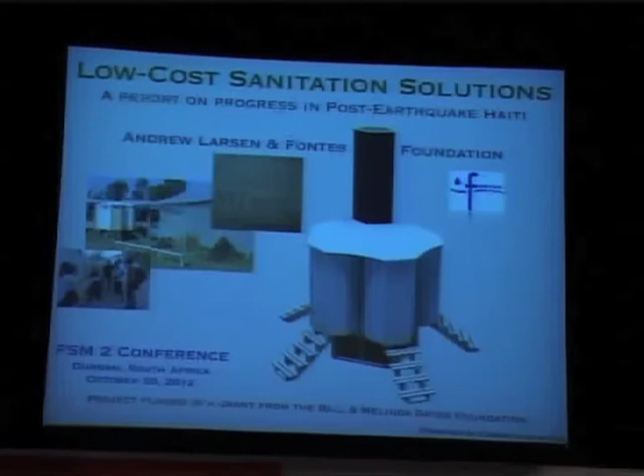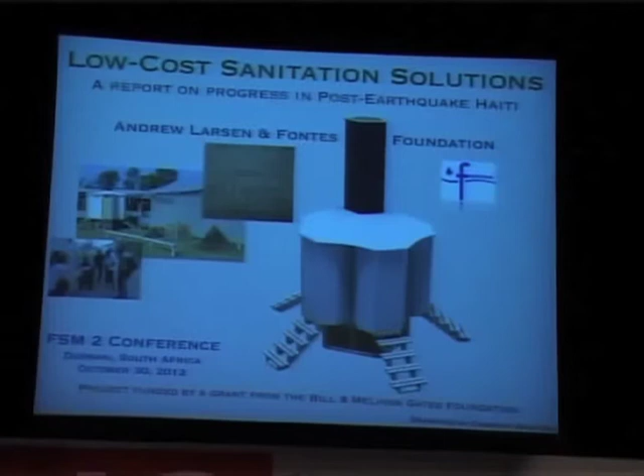...possible for me to be here at this conference and also to be able to work on this idea that I had a long time ago for toilets, and we're working on it in Haiti, but the idea is to have it be able to work in a lot of different places, including emergencies, which is one of the aspects that we want to look at.

We started in Haiti because I had experience there already from the 2010 earthquake. Of course, pictures a friend of mine, Richmond Arquette, took these, and you can see these people are so resilient, and yet they live in such appalling conditions. So it's a remarkable place to work. It's a challenging place to work, but it's good. We like working there.

It's very hot. That wears on you after a while. We've been there all summer installing these toilets with the community. We basically built them with the community from the ground up, all the tools and skills necessary. And so I'm going to go through and talk about the toilets, the physical structure, and then I'm going to talk about the process. Because there's kind of two aspects to what we feel is innovative in our approach.

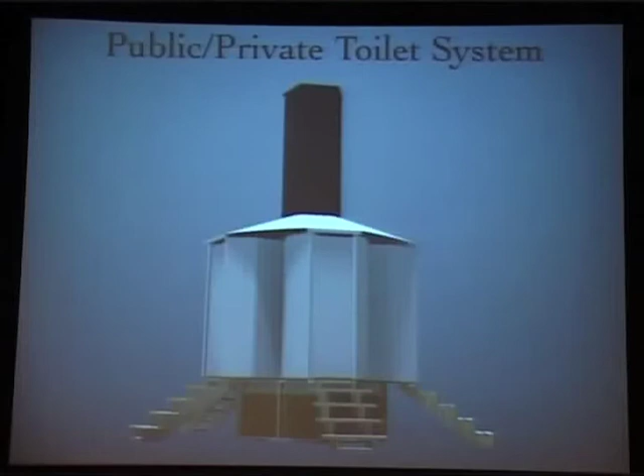Of course, we know how important it is with some of these issues here, and cholera is just one of the many. It's getting a lot of attention, but there's so many diarrheal diseases in places like this where you have high density. So here's just a picture of it. I'll come back and talk a little more about the design. And basically, we're using enhanced ventilation. So the top of this plenum is 15 feet off the ground.

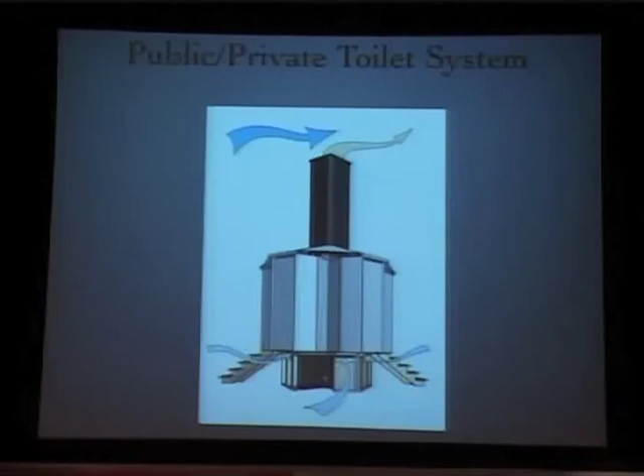So you have air moving over, and you get this draw that comes up. The air comes in the intakes, which is the support bin of the compost. That's where the composting is happening, or just feces desiccation, depending on how it's set up. It can work in both ways. And that air is drawn through, and we're just really maximizing the amount of airflow we can pull through this. And part of that is because of the way we build the toilet block, which I'll talk about in just a bit.

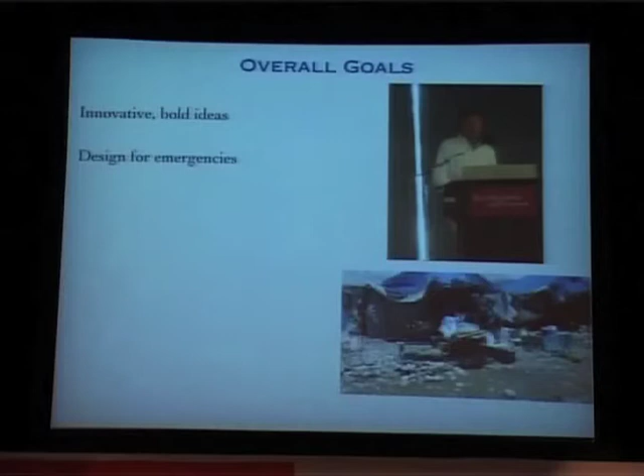But the overall goals, as we know from the Gates Challenge, have been to be really innovative and out of the box, and really try something that you only dream up at 2 o'clock in the morning, which is what I do most of the time. I wanted the structure to be low cost and robust, because a lot of the structures that we had seen, that we wanted to do our particular process in, were just too expensive and too immobile. And I wanted something that we could go into an emergency and sort of set these up out of a kit even. As it's turned out, we're working in development as well.

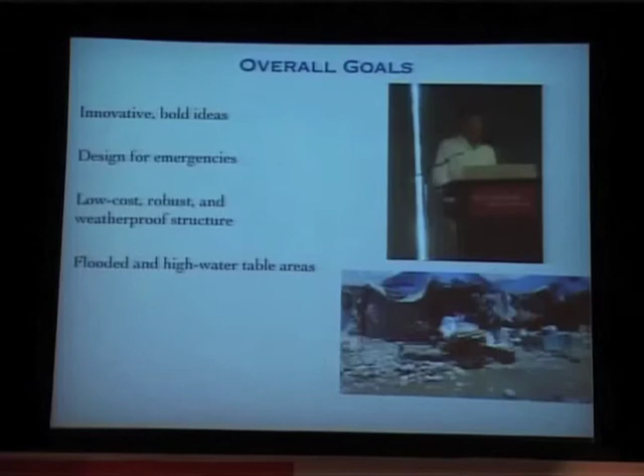There's a crossover there. So one of the areas that I chose to really focus on was flooded areas and high water table. In the community that we're working in, just since Saturday when I got on the plane, we just got word that 5 more houses got washed down the river. And this same community had to withstand Tropical Storm Isaac, which blew down most of their plantain and banana trees, which was their source of income. So there's some people living in some very precarious situations as far as natural disaster is concerned.

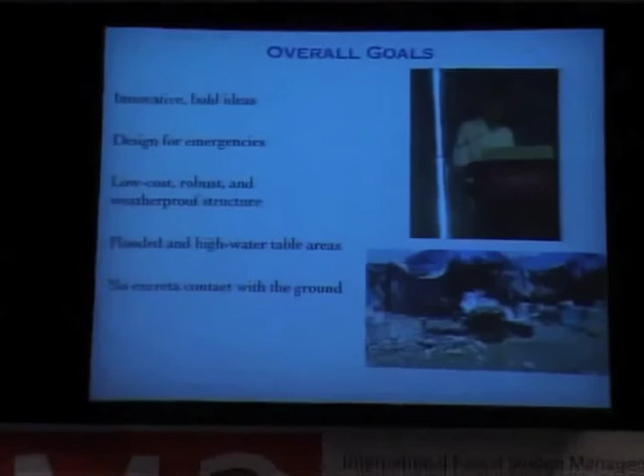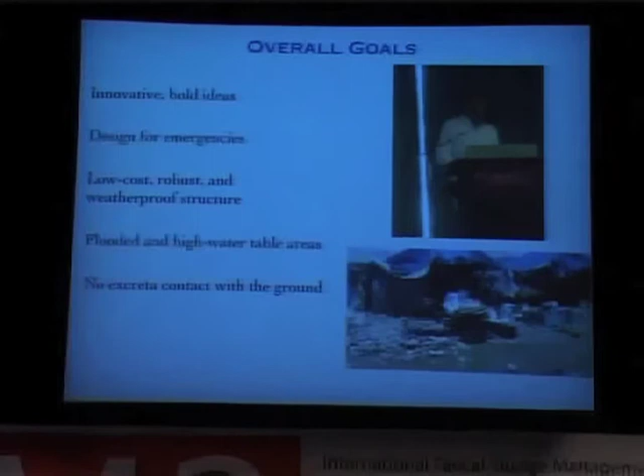Fortunately, I have to say, we're really grateful our toilets have held up through all this, and it's almost trivial to say that in light of the fact that people are losing their houses right in the same area. But we have to keep working on this. So my thing has been to make sure that no excreta is coming in contact with the ground. Urine, feces, everything is contained, it's dealt with, it does not come in contact with the ground until it's become something that's safe and usable.

As has been said by many people at this conference, this social aspect of sanitation, which is everything from awareness raising to designing and working with the communities, this is what we've done, and this is why we went and lived there. We've lived there all summer, and a lot of the conversations about shit happen, you know, on your porch late at night. It's not something you can come in your SUV and have a controlled discussion and then go back to the hotel.

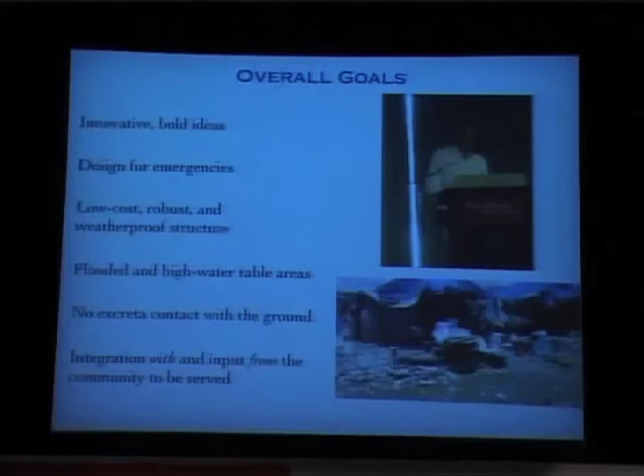We had to get to know these people and really find out why they felt the way they did about stuff. And so we were glad to be able to live in that community. Just a few things about the design now.

So the idea that I have is to take, in the US we have billboards everywhere, and they're huge. And they're made out of a really highly engineered material. It's a reinforced flex PVC. It has an advertisement on one side, and then it's either black or white on the other side. And so we don't show the advertisement. That's the only requirement when you reuse this stuff.

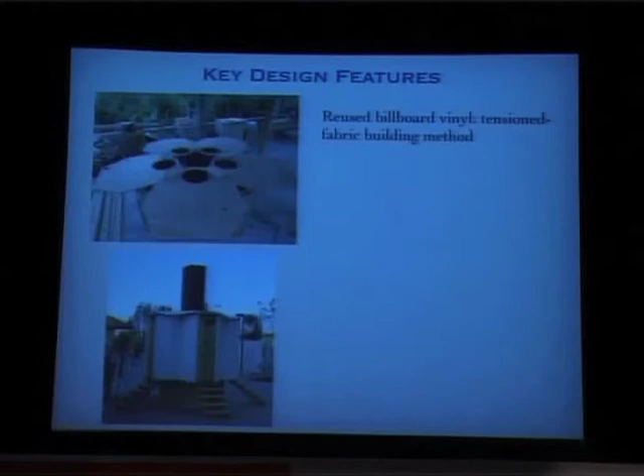And then we use either the white side or the black side, depending on what we're trying to do. White to try to keep the temperature down, and black on this ventilation plenum to help induce thermal flow. So you have this really inexpensive material and then basically a lumber frame, and then you do this tension fabric structure. And it's not a tent. The walls don't flap around in the wind. It behaves like a very taut structure. And we make sure that we keep them like that.

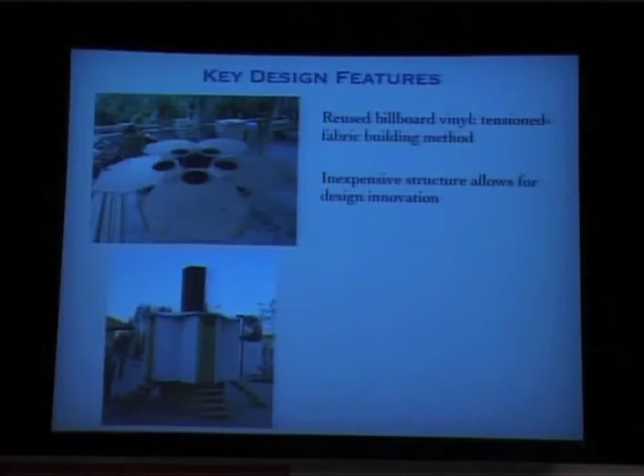The fact that it's inexpensive, the reason I was drawn to designing this is because I wanted to be able to play around with things like a lot of airflow for feces desiccation, or really being able to make sure there's no odors, because the odors are going out at 15 feet above the ground. So this is what drew me back into my construction days. I need a really inexpensive structure that I can change the design if I need to, and the existing things that I saw were not doing that.

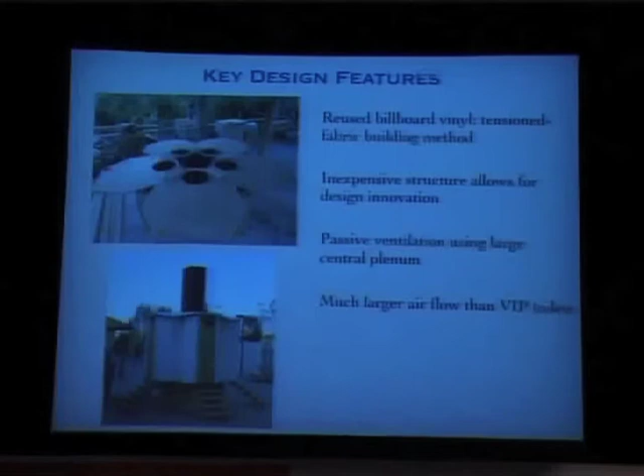So, for instance, the ventilation using this large central plenum, we get huge airflow. I've been testing it with my handheld anemometer, and the aperture is this big around, it's 18 inches across, and you're getting a nice flow, roughly a couple of feet per second, and that moves a lot of air when it's that wide.

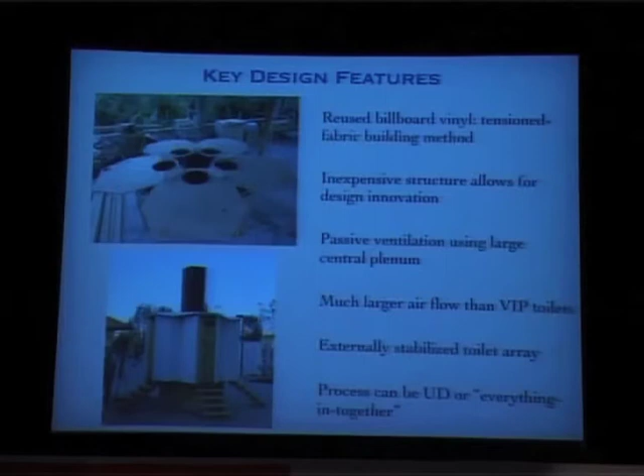The toilet array itself sort of looks like the lunar module, but the stairs come out and actually stabilize the thing physically. The process can be urine diversion or everything in together. We did everything in together in Haiti because it was just too hard to try to talk to people about urine diversion along with every other thing that we were dealing with. So we said, we're going to just keep it simple. We've already done composting there. We knew that worked. And so we kept it all in together. But the urine diversion part is something that the same structure will accommodate. We're just going to do that in a separate step.

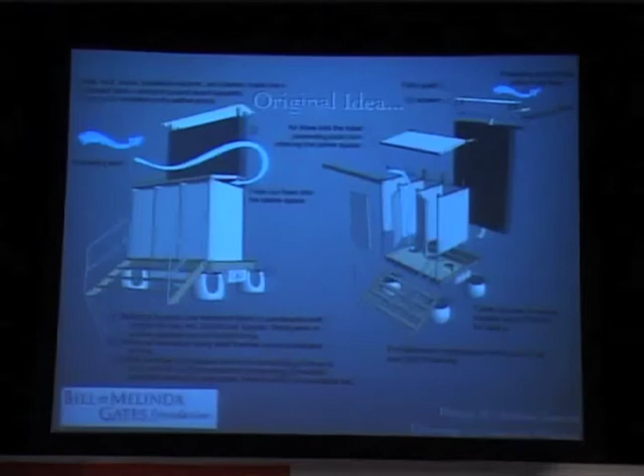And I want to point out, too, that the structure, if somebody comes to me and says, I have my own process, can you give me a toilet block? Yes, that's the other part of what we want to do. And I've had those conversations already with several people. I'll make a structure that works, with a door that works, and it doesn't fall over in the wind and so on. And you can put in there whatever process you want.

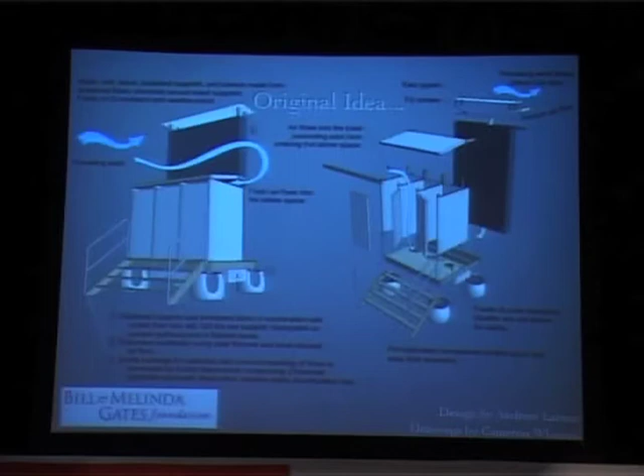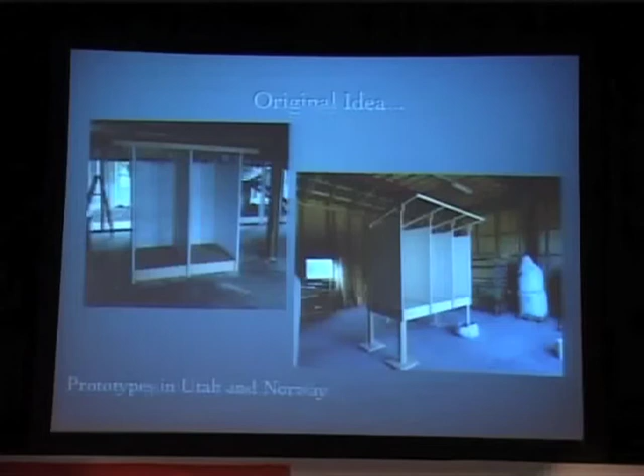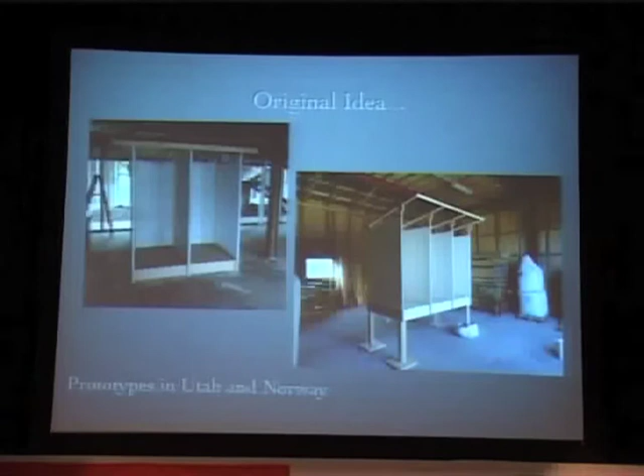This was the original idea. I'm just showing this first. This is very boxy and strange, and I thought it was a great idea at the time. We built a couple of things, and it just didn't quite suit me right. And this design iteration kept happening during the grant period, and it's been really fun to build an experiment in the shop, and then go draw, and then take the drawings and build that again, and then the two things inform each other. The design now looks like this.

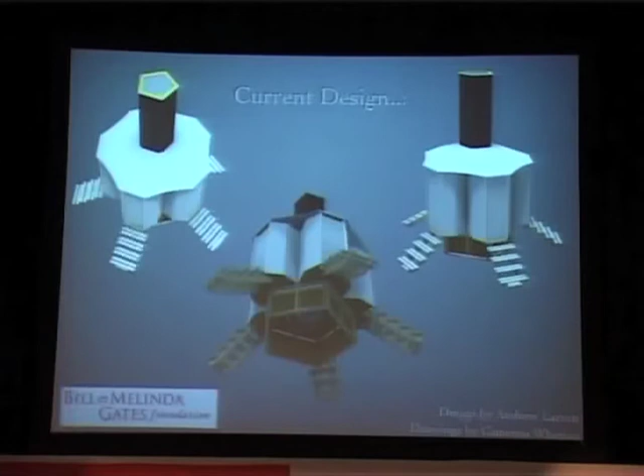The bag isn't shown here, but the same material that we're using for the structure we use for a bag underneath this that you can take out. And this stuff is ridiculously cheap, and it comes in big pieces. So I have no seams. I don't have to sew anything together. There's no vinyl welding. All I'm doing is I get scissors and we cut.

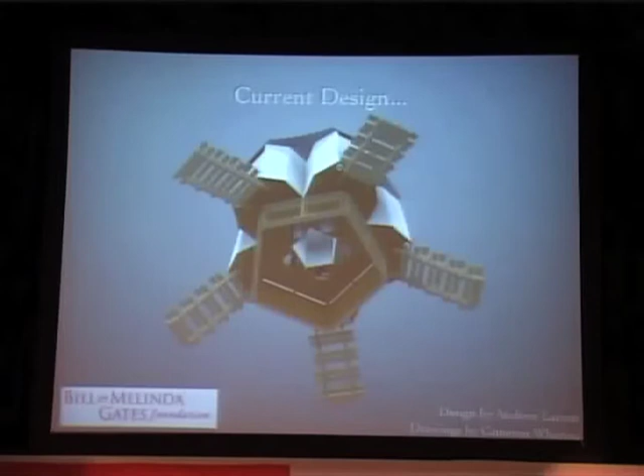And if we need a piece that's bigger, we get another one. But we work it out so that we're not wasting material. Here's what they look like. These first couple ones were not quite where I wanted them. We're getting a little better at building them.

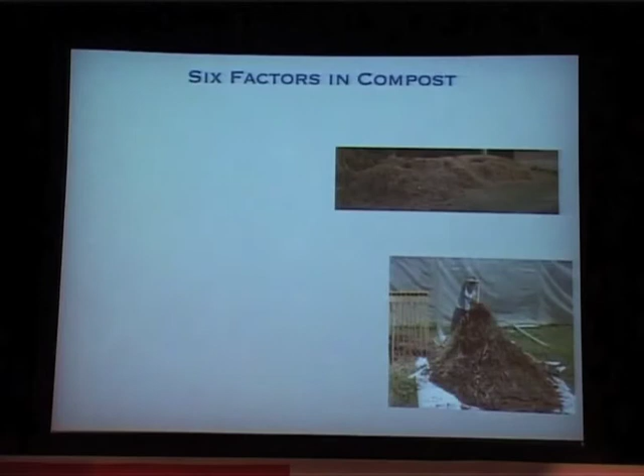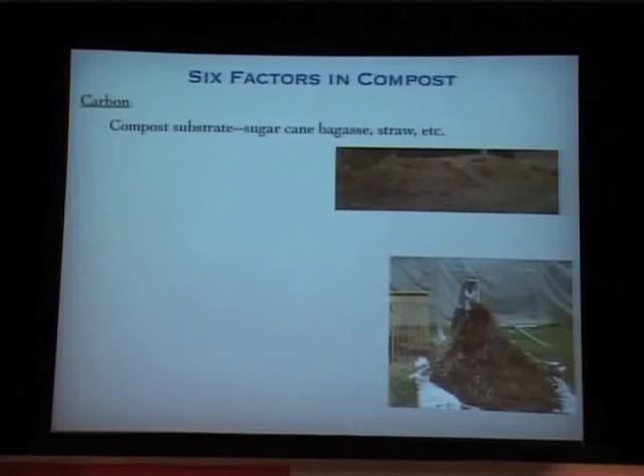I want to talk a little bit about compost. A lot of people know this, but I want to just point these things out. Carbon, which in our case is sugarcane bagasse. It's an excellent source of carbon. There are many others that can be used, but this is what we've been using in Haiti. Of course, the nitrogen is the excreta and food refuse, and we're using all that.

Oxygen, of course, you have to have. There's the interstitial space where you have oxygen, but then you also get it when you turn the compost, and I've become a big fan of turning compost. I didn't start out that way, but the more I thought about the problem of how does the air get to the center of the pile, I decided you've got to turn, and I think that's a good choice. You can also add water when you need to do that. Compost needs a lot of water, I'll tell you. It needs to be wetter than people think.

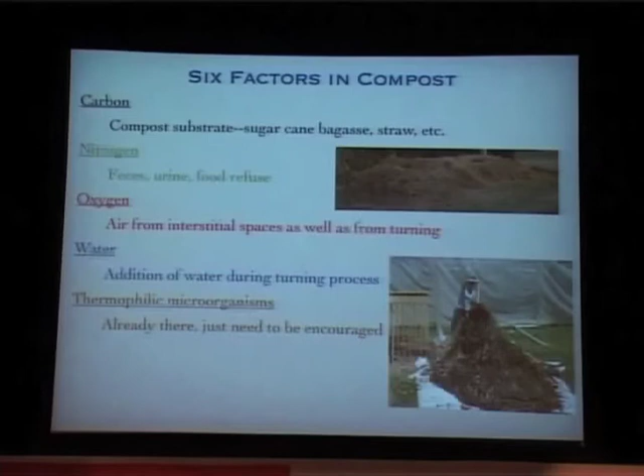Thermophilic microorganisms. They're already there, they just need to be encouraged. Think of your car in third gear at a stop sign. It's not going to work. You're not going to be able to get started. But think of trying to make a long trip in first gear. That's going to be a waste of time. So what happens is these thermophilic organisms are there when the temperature starts to come up. They wake up and they get in the game in a serious way, and then the temperature really goes up.

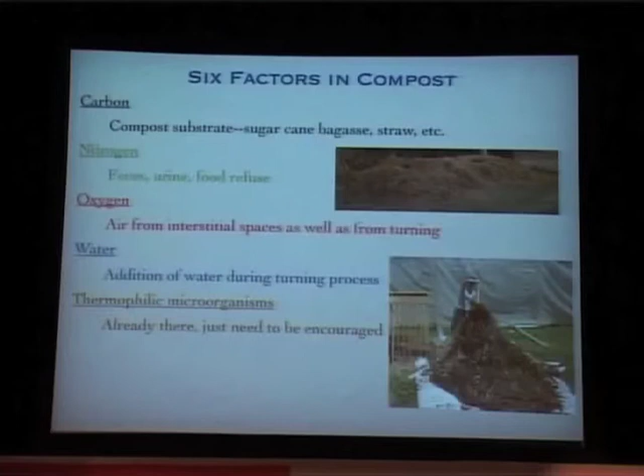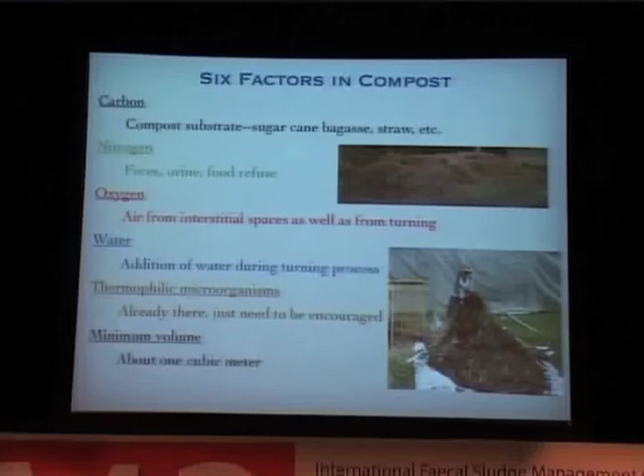And it just struggles to get beyond a certain temperature. In Norway, they studied this, and 43°C was as high as they could get on individual composting toilets. We're getting temperatures between 70 and 75°C. It's actually almost too hot.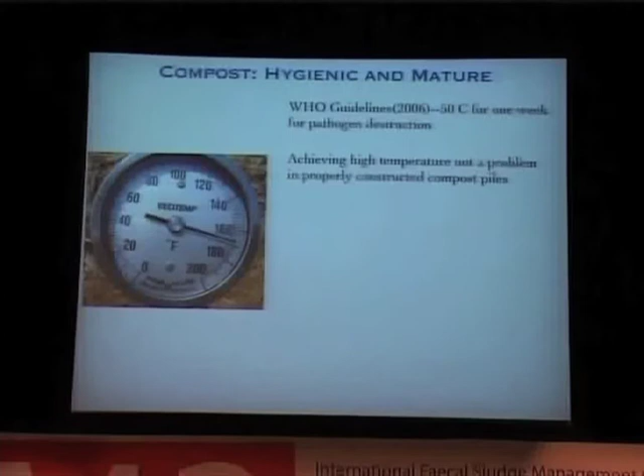All right, so I want to talk about the guidelines. It's 50 degrees C for a week. This is the WHO guidelines. With Ascaris lumbricoides, you need more than that, and there's an interesting division between the WHO guidelines and what we know about Ascaris, and so I want to talk about that a little bit. I want to skip through a little bit of this to stay on this theme.

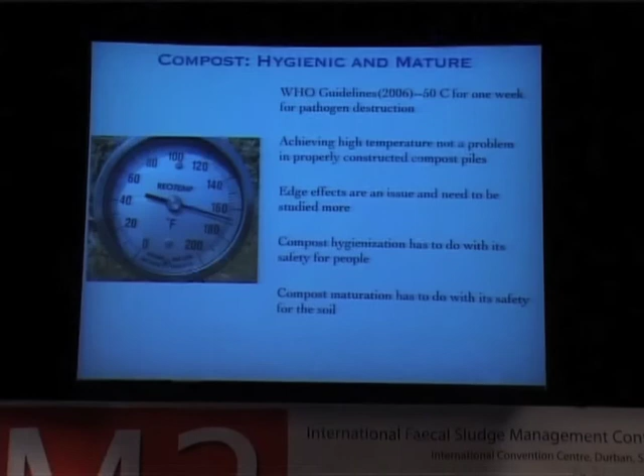The hygienization part is for the safety of the people, and that's the users or the maintenance people or anybody involved. Compost maturation is for compost effectiveness in soil. Those two things really are different. My focus is always on, I want it hygienic. If we give fertilizer value and compost value later, that's great, but I want the sanitation covered first.

I'm just going to point these out, and then I'm going to go on to the next slide. These are the guys I've been reading, and look how old some of these documents are. There's a great volume of information out there that talks about excreta. This problem's been around for a long time. The book that I'm currently focusing on the most is Scott's book, which is actually both Winfield and Scott's work.

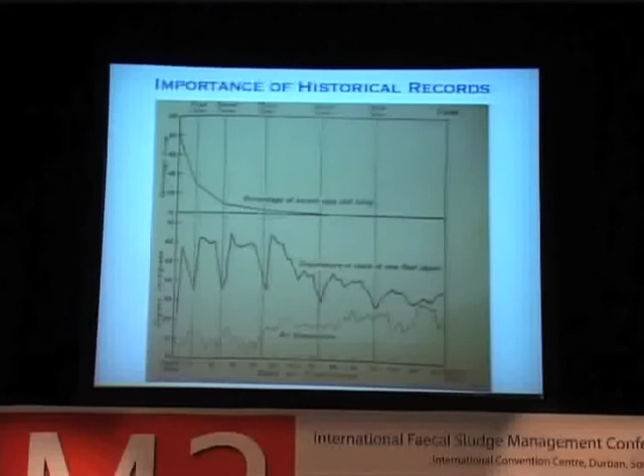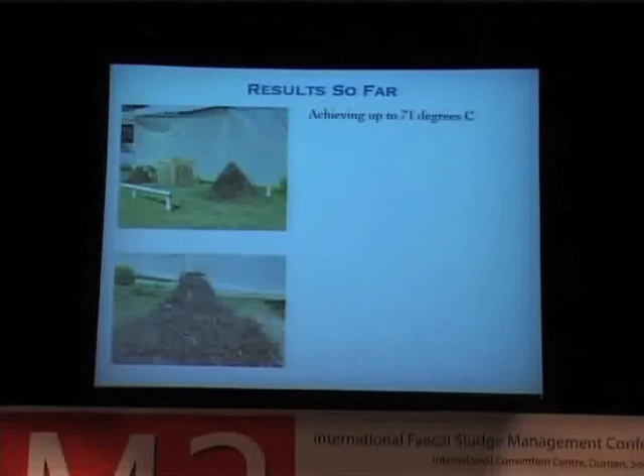And I want Ascaris to be what I'm going after, because cholera dies at 45C. The things that are getting a lot of attention actually die off fairly quickly as temperature goes up. But Ascaris, which is not necessarily deadly, but extremely bad in a lot of other ways, is really hard to get rid of. So our results so far, we did experiments all summer as we were building the toilets, kind of at the same time.

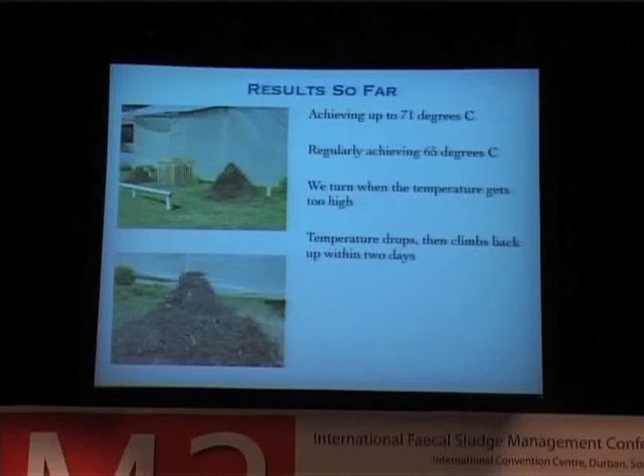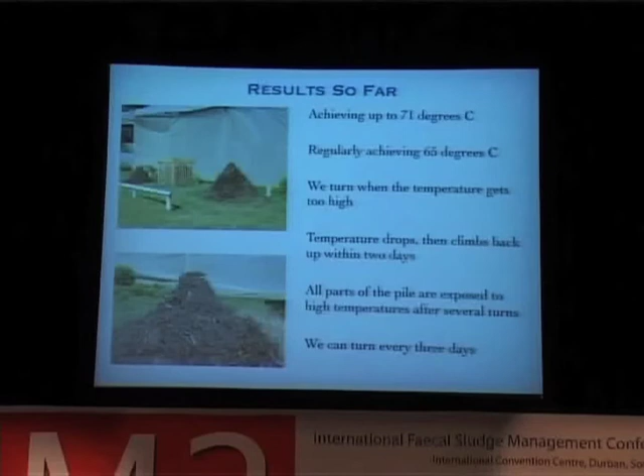We were getting 71, regularly hitting 65. We were turning when the temperature got high, which was every couple of days. It drops, you water it, it drops to ambient, shoots right back up. And that lets you know that the microorganism population is happy to get some air and water, and they just get right back to work. And after several turns, everything gets exposed. I know there's some controversy about that, but we're turning like 5 times. And following what Scott and Winfield show, I believe that's a good way to do this.

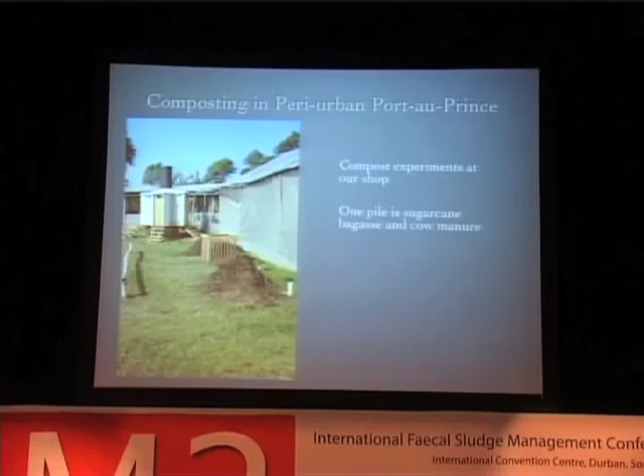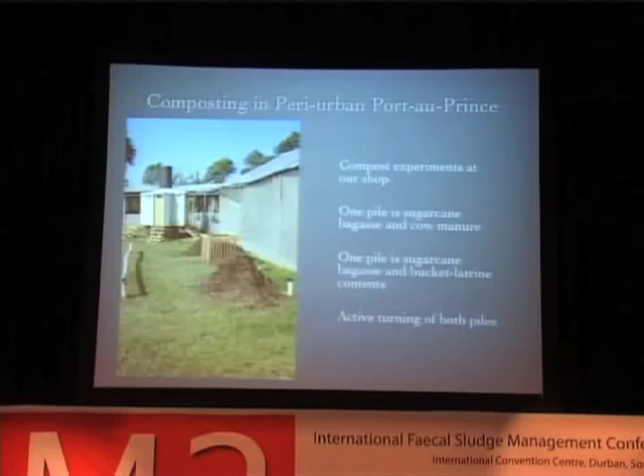That was our shop and our little area where we were building the toilets. And we experimented with cow manure and the bagasse, and then also with human excreta and the bagasse. We had some bucket latrines that we used for that purpose, because we were building the toilets at the same time.

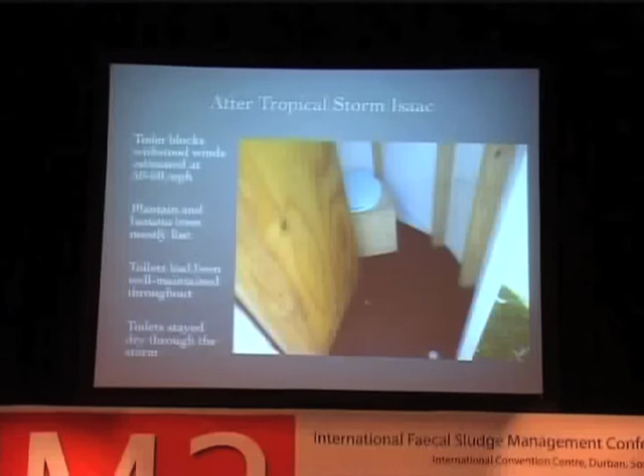This is after Tropical Storm Isaac. As you can see, the toilet blocks are still standing. The winds were very high. The trees, like I mentioned, were lost. But the families that are using the toilets are maintaining these. And you can see it's quite clean. And the toilets stayed dry through the storm, so we were happy about that.

Here's just another view. So the users are adding the bagasse, and that's all. The family maintains the toilet cubicle the way you would any bathroom. Just keep it clean. We don't want anybody to have to become a microbiologist to use this toilet. That's not the idea.

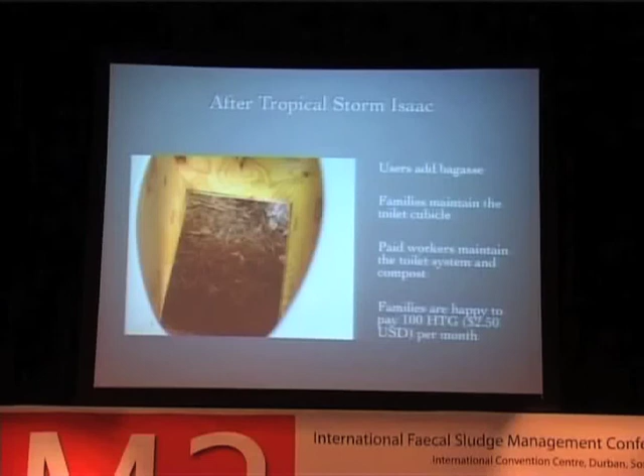There are paid workers that maintain the overall system, and that's derived from the families, who are happy to pay 100 gourdes for this service. And this is in a very poor area. They like these toilets enough that they say, yes, we will pay that. So it's a private toilet in a way, but it's sort of public as well, because you can't get private toilets in every house in Cité Soleil. It's just not going to happen as far as I can see.